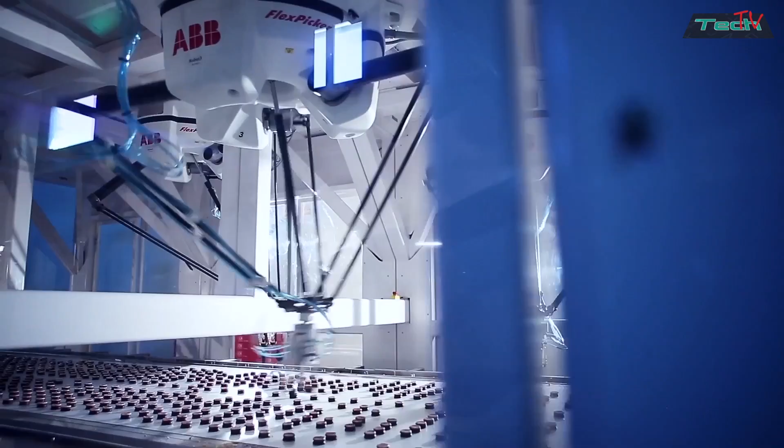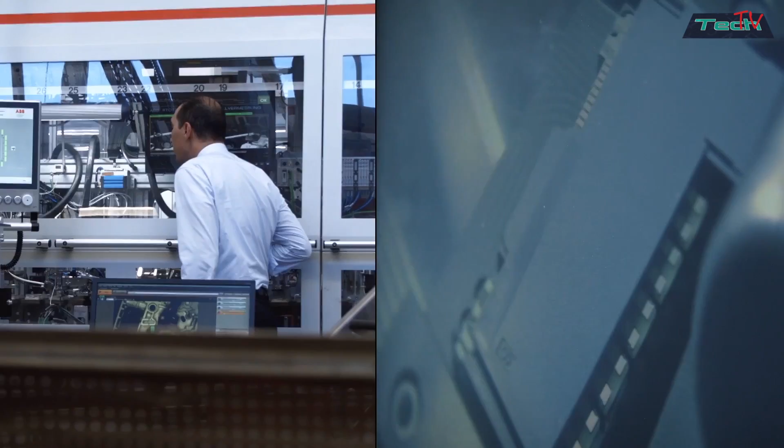It's the final piece of the jigsaw. ABB has long been a global leader in the industrial automation business. Now, by pairing with B&R's innovative products and solutions, the company says it's closing a historic gap to deliver an unmatched, comprehensive offering for machine and factory automation.

Effectively, we'll become a powerhouse, one-stop shop that is basically unrivaled in the industry, because there is no one who would have the PLC, the drives, the motors, the robots, the distributed control system, and yet these are the key automation ingredients, along with sensors and analyzers that we already have in ABB that form automation solutions.

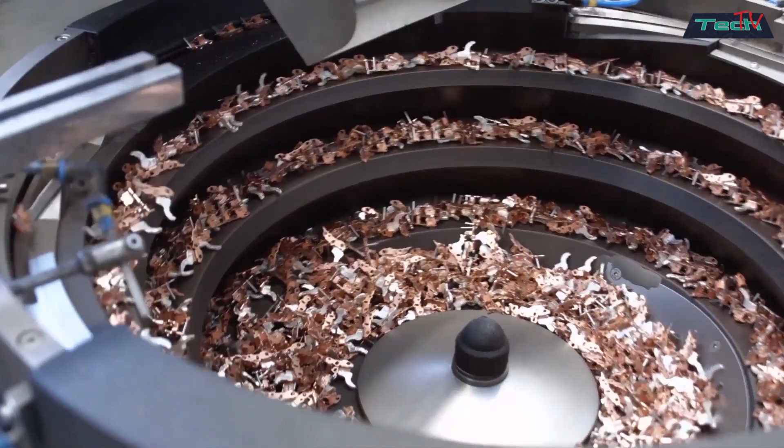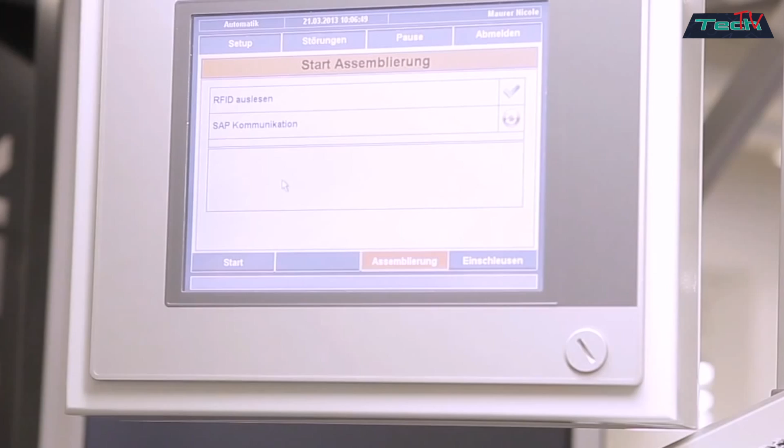ABB already has well-known leading solutions in advanced robotics, drives, control systems, sensors and software that run a modern factory. What B&R adds is expertise in software-based open architecture solutions, in particular a type of digital computer called a programmable logic controller, or PLC, which is used to automate manufacturing processes like assembly lines or groups of robots.

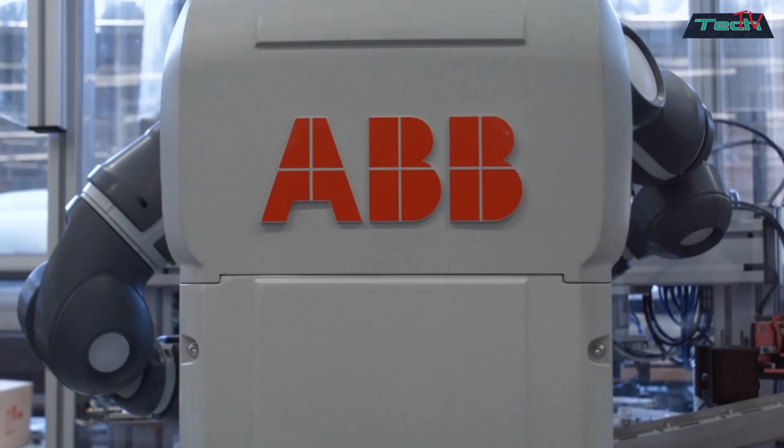It means ABB's solutions now span the entire automation spectrum. Following on from the commercial launch of ABB Ability, which brings all of ABB's digital solutions together under one offer, it means the company is now uniquely positioned to seize the opportunities of the fourth industrial revolution.

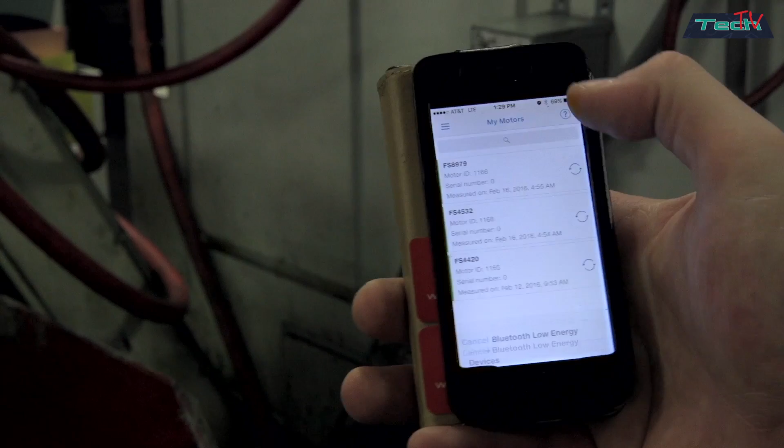With B&R, we're closing that gap. We bring in the IoT solutions of B&R, we bring in the application software suite, we bring in all the capabilities that they have in Automation Studio to design and rapidly install the solutions in the industry.

So it's a perfect match also from a digital perspective. Together, we will have an unmatched portfolio on digitalization for our customers in the fourth industrial revolution.

The complementarity offered by B&R makes this one of the most significant acquisitions in ABB's recent history, and B&R's headquarters in Austria will now become ABB's global centre for machine and factory automation, unlocking value for customers and writing the future of industrial digitalization.

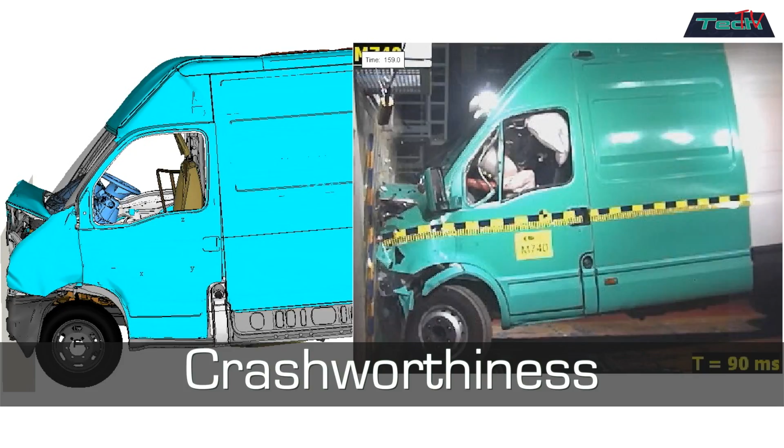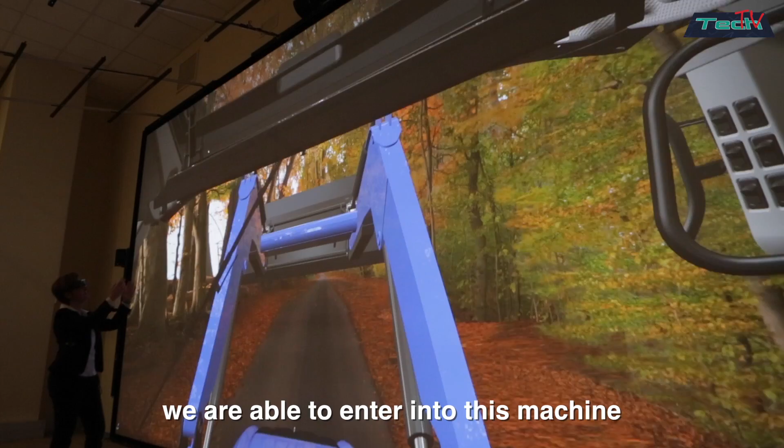The main areas of our simulation technologies are crashworthiness, safety, soil and crop modeling, ergonomics, fuel consumption, and finally virtual reality. We use virtual reality for modeling the tractor or the industrial machine that for the moment does not exist. With the help of virtual reality, we are able to enter a machine that is not yet existing.

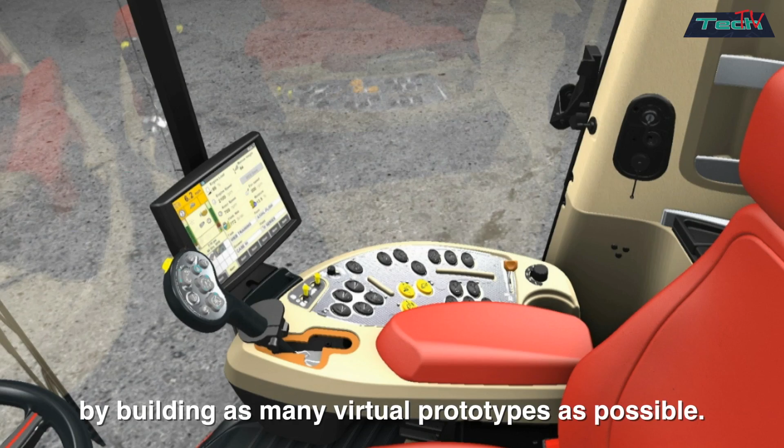With this technology, we try to reduce the number of physical prototypes that we have to build by building as many virtual prototypes as possible. We try to optimize our design in the virtual stage by doing as much testing as we can before we go to that physical prototype. Therefore, we can really optimize it and try out as many design options as possible.

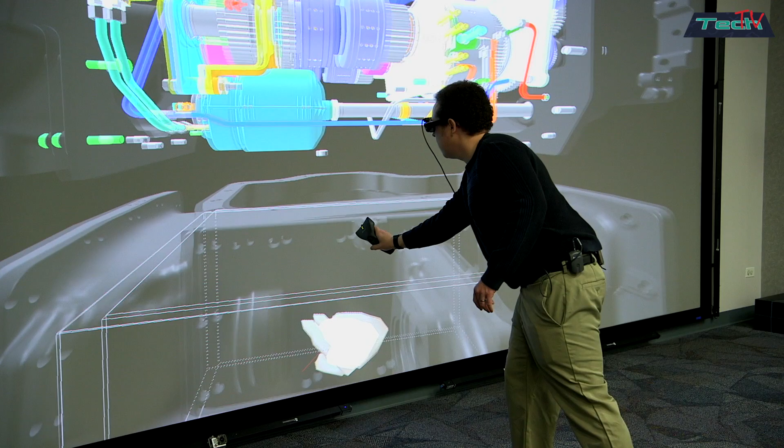So let's walk through this transmission a little bit. You can see we have the final drive here on the left. You can see the hydraulic motor up here. And we can make sure that we have a tool clearance to where we need to get to by grabbing the tool.

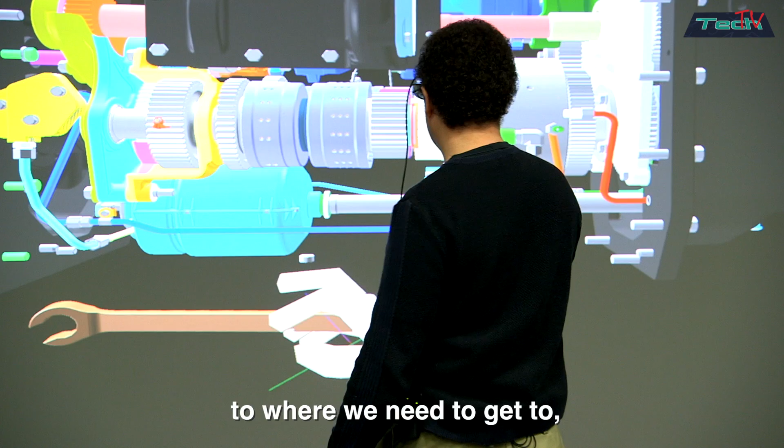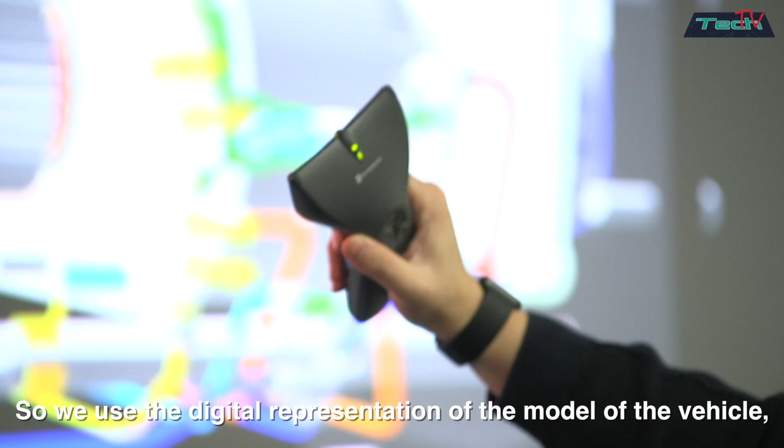In the virtual reality room, we use collaboration tools in order to share a solution between several teams. So we use the digital representation of the model of the vehicle, which is called a digital mock-up. In this way, people can share the same solution and can work together without being physically in the same location.

Thank you, Gennaro. Thank you, Andrew.

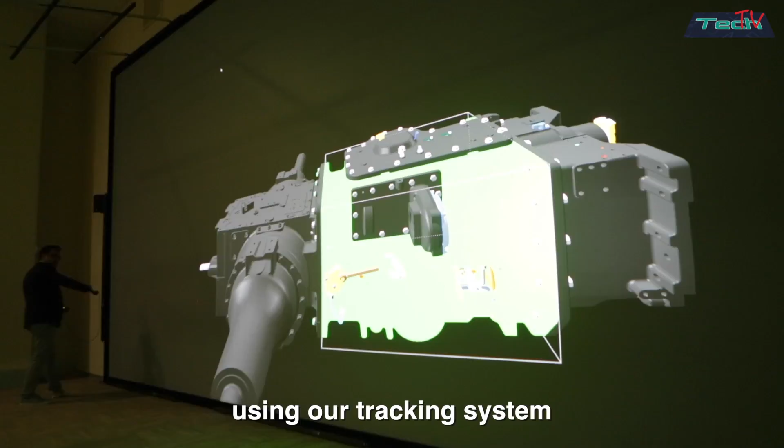So a little while ago, I showed you a demonstration using our tracking system to walk around and pull apart virtual components. This allows the user to really get an understanding of the space claim of all these components, of any clearance or interference issues that may exist there.

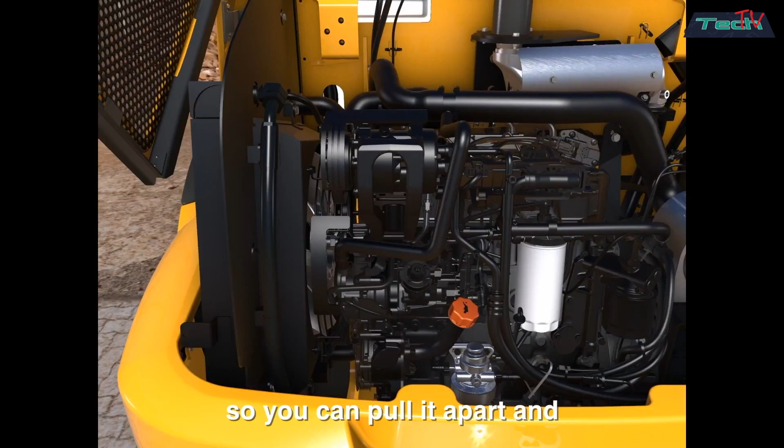And so you can pull it apart and get an understanding of the overall size and overall structure of the machine. It's much different seeing it that way than seeing it in 2D on a computer screen.

You have seen that to run all complex simulations, we need high performance computing. Today we have a network of high performance computing of about 2,000 cores. We have several HPC servers all around the world in different regions.

For me, it's very exciting to stay in contact with humans, with people, understand their needs, what is comfortable for them, and help them stay well inside the product. For this reason, I interview people, I make questionnaires, I go with them in the field and really drive with them and use the product like they do. And so, through this experience, I'm able to interpolate the information and reproduce it in my virtual world.

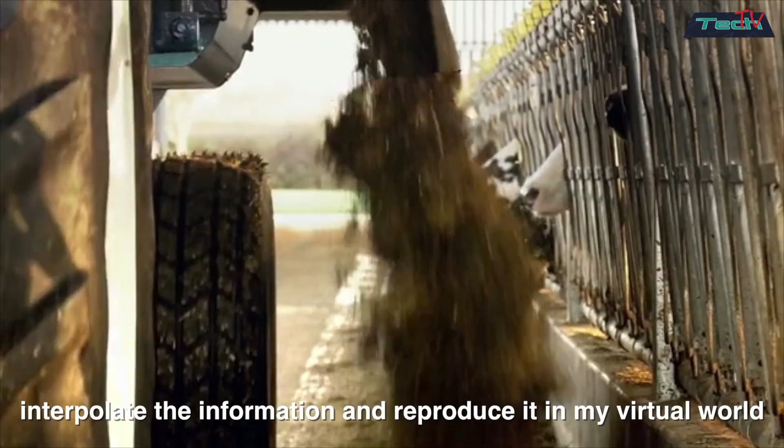The new digital technologies will transform the way we think, design and produce our products. This technology will require new skills, a new job, but our people are already prepared for this.

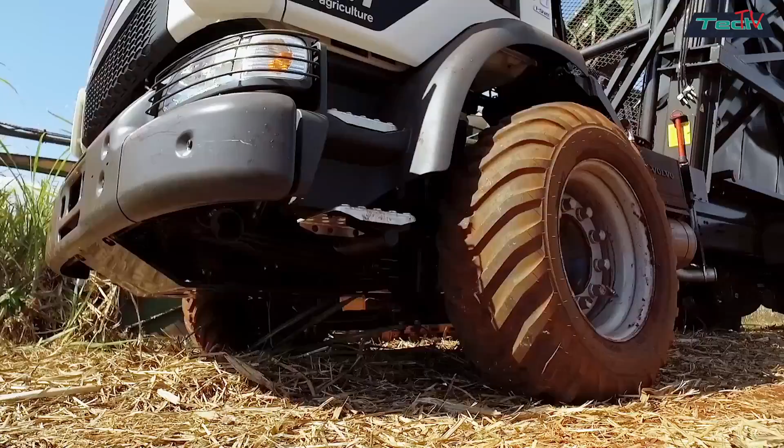Brazil grows more sugarcane than any other country in the world. However, every year about 4% of the crop is lost as young plants are run over and the soil is compacted by trucks and tractors.

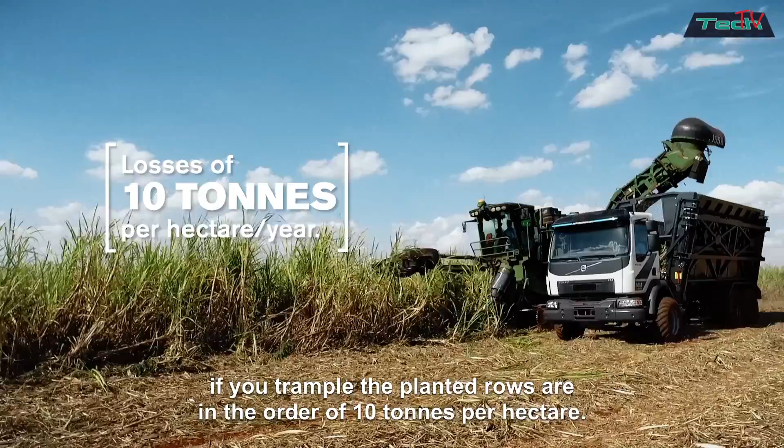Now Volvo Trucks is testing a self-steering truck that makes it possible to reduce the losses and provide bigger harvests. This technology works by uploading the maps of the plantation lines into the truck, and then with these maps on, it avoids the trampling of the plantation lines.

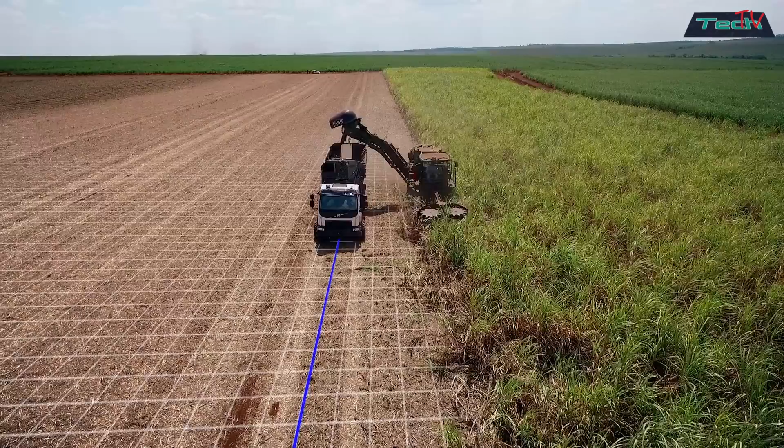The position is maintained using accurate GPS data. Highly sensitive gyroscopes ensure that not just the front wheels but the entire truck is controlled with great precision.

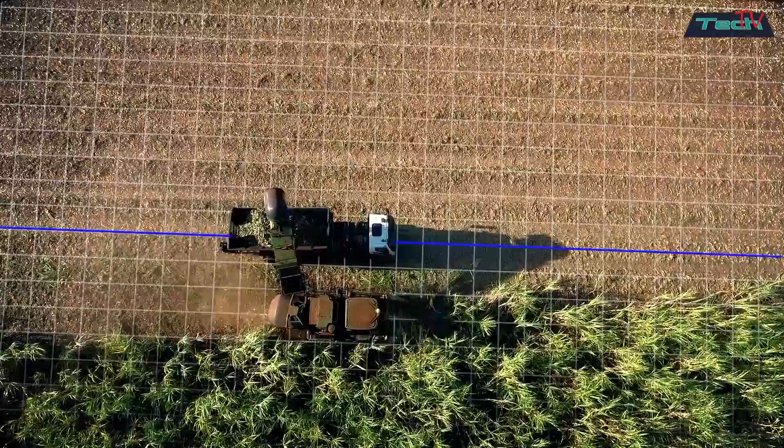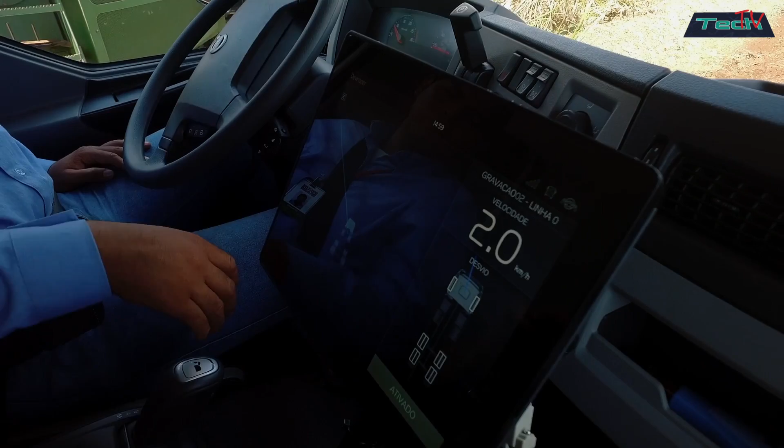Doing exactly the same thing manually again and again while keeping a high level of precision throughout a complete shift is very difficult. Today the driver faces the challenge of maintaining the same speed as the harvester, while at the same time keeping a watchful eye on his surroundings and concentrating on steering his truck with the required precision. Volvo's solution opens the door to higher productivity, underlining the important role of the driver and promoting a better working environment for a safer and more efficient execution.